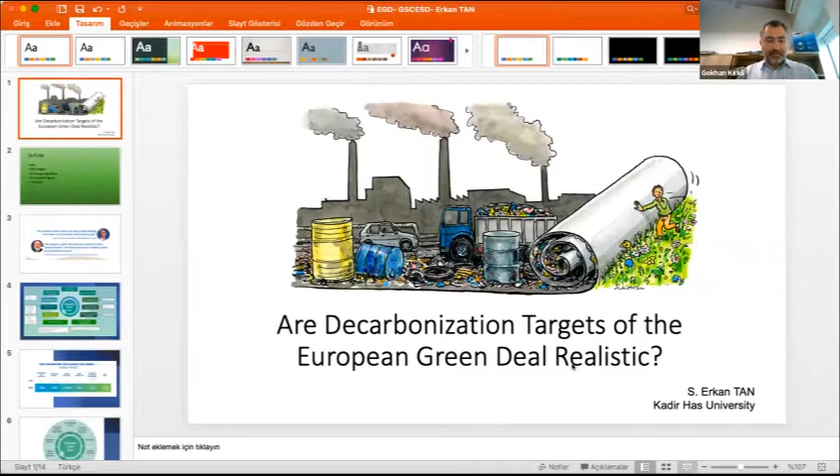Can you see the screen? Yes, okay. Hello again. I did this research last semester for a course of Professor Ediger.

The European Commission developed an extensive program called the European Green Deal. It launched in December 2019 and was approved in 2020 by the European Parliament with the purpose of making Europe the first carbon neutral continent by 2050. At first glance, it could be seen as a policy against climate change, but it is actually a new and green growth strategy of the European Union.

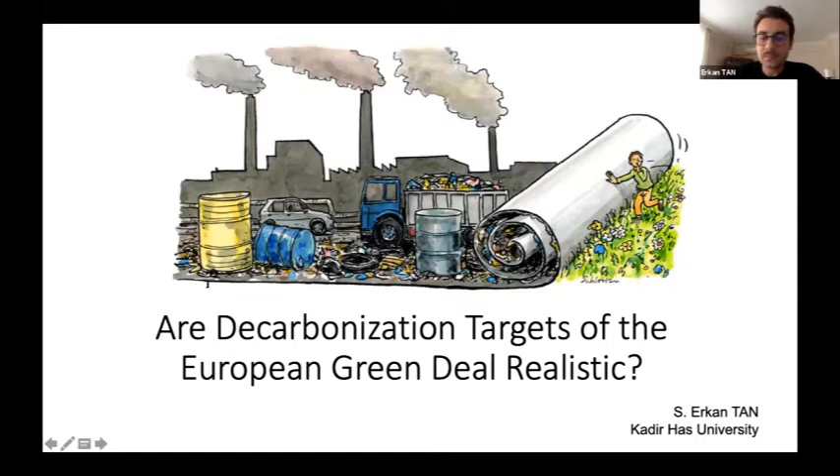In my presentation, I will talk about the EGD's targets, the EU's energy regulations, the EU Commission figures, and then I'll conclude.

As we all know, the industrial age started after the Industrial Revolution, and toxic gases, carbon dioxide released into the atmosphere, increased. We feel the negative impact of this on humans, like all living things in the ecosystem. Future generations will feel these threats more seriously, economically and socially. And the European Green Deal was created in response to these threats, actually.

The President of the European Commission, Ursula von der Leyen, described the European Green Deal as our new growth strategy. It will help us cut emissions while creating jobs. And Frans Timmermans said, we propose a green and inclusive transition to help improve people's well-being and secure a healthy planet for generations to come. As can be seen from these definitions, the European Green Deal is an economic growth policy that regards climate and environmental concerns.

As can be seen, in order to realize this transformation, they created policies for different areas under 11 titles. And in the study, I focused on the decarbonization targets of the European Green Deal.

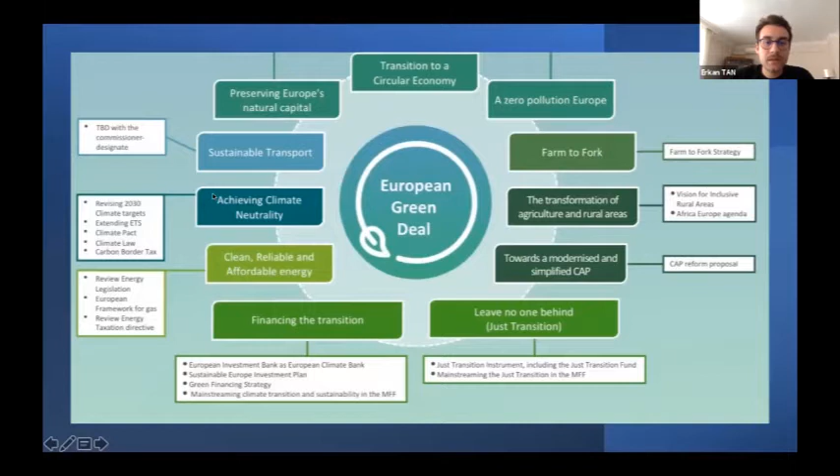The European Green Deal divides into two steps, such as 2030 and 2050 targets. These 2030 targets are also serving as a cornerstone towards the zero carbon emission 2050 targets. The European Commission has determined its targets for 2030 from the European Energy Directives in line with the Paris Agreement.

There was a revision of the 2030 climate targets in the European Green Deal, and they augmented the greenhouse gas emissions reduction target for 2030 from a minimum of 40% to a minimum of 55% compared with 1990 levels. But they didn't make any change for renewable energy and energy efficiency targets.

In the 2050 targets, the European Commission aims for a transition to a clean and circular economy. In this regard, it is emphasized to ensure that resources are used fairly and efficiently.

Also, the EU adopted a climate law in December 2020 to transform the 2050 climate neutral targets from a political challenge to a legal obligation. With this law, the political, economic, and legal regulations required to achieve the goal have been completed. Besides, the structure was arranged so that all sectors could act for the necessary change. So the EU will invest in eco-friendly technologies and support industry to innovate.

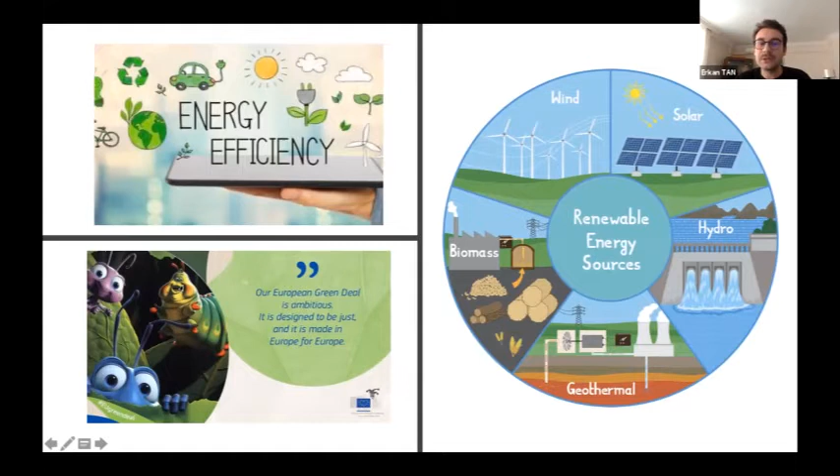European integration is based on political and economic processes. Member states cannot accomplish a coherent and uniform integration in energy due to their capacities, economic strengths, and international positions. Therefore, there are differences in the degree of ceding authority of union members at the European level.

European tendencies about energy-related issues can be divided into three phases. In the first phase, energy supply security for Europe was significant. The European Coal and Steel Community was the first common energy policy and integration policy among the countries in 1951. Its purpose as an international organization was to operate coal and steel reserves during the Cold War period, with a supranational basis.

After that, in 1957, the European Atomic Energy Community was established as an international organization after the Suez Canal crisis. The objectives of Euratom are to create a common market for nuclear power, to distribute electricity generated from nuclear power among member states of the community, and to sell the remaining energy to non-member countries.

In the second phase, they focus on the internal energy market, which has been privatized and competitive since 1987. The Single European Act was signed in 1986. It created a European energy market under the title of an internal energy market and liberalized the European gas and electricity market. In order to be successful, it began the ETS emission trading system in 2003 and became a pioneer in the world.

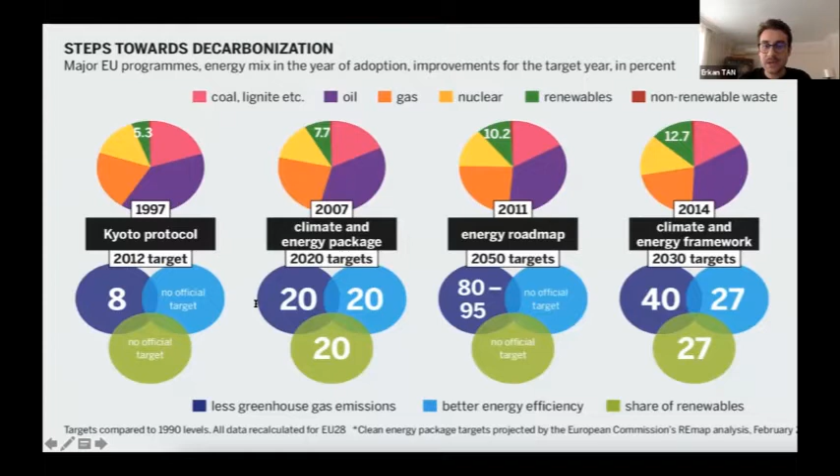In 2015, the European Commission launched the Energy Union Strategy, which aims to create an energy union based on secure, competitive, affordable, and sustainable energy for EU consumers, such as households and businesses. There are five aspects of the energy union: first, security, solidarity, and trust; second, a fully integrated internal energy market.

Third, energy efficiency. Fourth, climate action and decarbonization of the economy. Fifth, research, innovation, and competitiveness.

The main reason for the EU's struggle against the effects of climate change is its economic interests. For this reason, the Paris Climate Agreement, signed in 2016, is an international binding agreement which supports the EU's goals. And finally, as it's known, the European Green Deal was launched in 2019 by the European Commission.

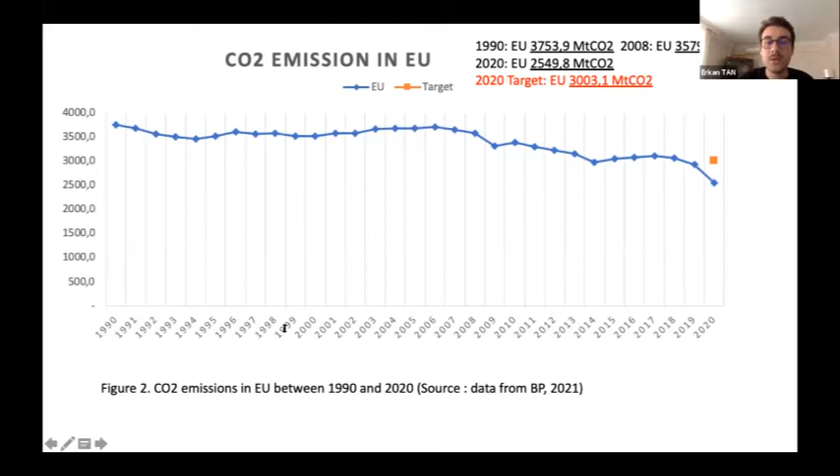In conclusion, in my opinion, the EU is aware that the devastating impact of climate change will adversely affect its economic development and competitiveness. Therefore, they have to realize a green energy transition. Moreover, the global pandemic, which started at the beginning of 2020, has created an opportunity for decarbonization targets, similar to the 2008 global economic crisis.

In light of this information, previous regulations of the EU have even exceeded the targets and have been successful. Furthermore, in future scenarios, it is expected that the 2030 and 2050 targets, like the previous ones, will become true with the EU's new regulations. Thank you.

Thank you very much, Erkan, for this very good presentation. It's also a timely topic because, as we know, the Turkish Parliament ratified the Paris Agreement two days ago, so there are lots of news in the TV channels and other newspapers about this. Are there any questions from the audience to Erkan?

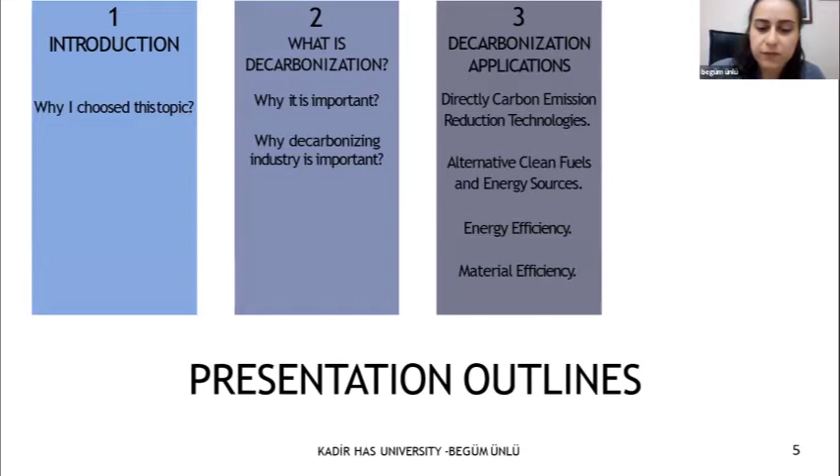Since my undergraduate degree is in industrial design, I learned about the industry through project ideas and internships, and met concepts such as sustainability and circular economy during my first work experience. Working to reduce environmental impacts in the industry became my focus over time, and I started my master's degree in energy and sustainable development. I aimed for my thesis to be close to circular economy at first, but through my research I discovered the topic of decarbonization - especially information from studies prepared around the world excited me.

In addition to the limited number of studies in this field in Turkey, the narrow scope of these studies made me realize that there is a deficiency in this field. So I decided to write this, hoping to provide inspiration to energy-intensive industries and related government organizations.

What is decarbonization? Roughly, we can say it's doing more with less. In Nakicenovic's words, decarbonization is doing the same work with higher energy efficiency and material efficiency, emitting less carbon per unit of energy consumed, and reducing energy, material or carbon density and carbon emissions through decreasing fuel, energy or material consumption.

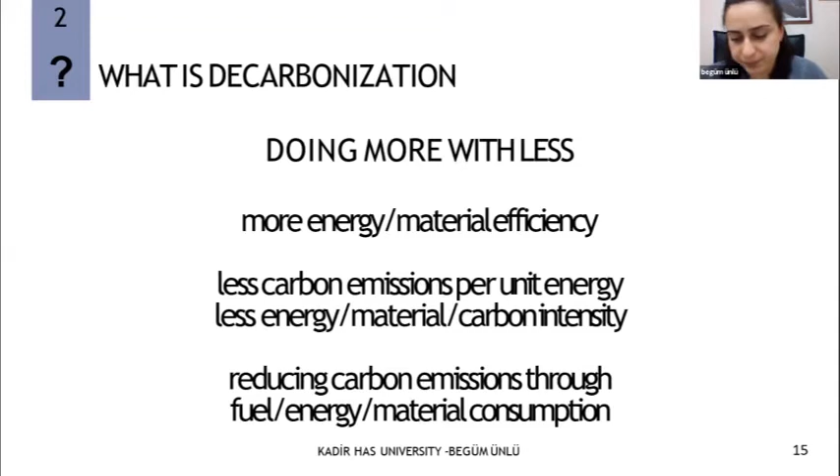Decarbonization is an important issue because we are facing a climate crisis globally, and we have to do something against it. Since the past, various meetings and agreements have been made in order to adopt common goals around the world. With each passing year, international organizations are increasing their pressure on countries to reduce their environmental impact and carbon emissions.

In this process, it is important to prevent the economy from being negatively affected. Ensuring decarbonization in industries where the economy is closely related, especially in Turkey, gives countries a chance for progress in line with these global targets.

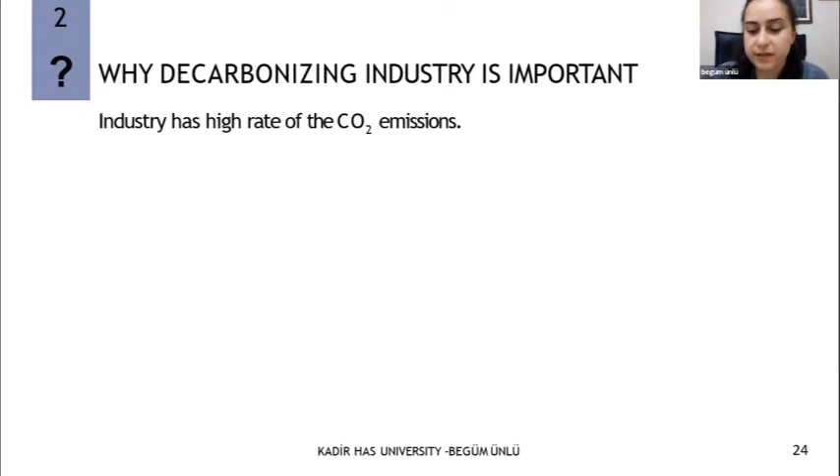Ensuring decarbonization in the industry is an important issue because the industry has a large share in carbon emissions. In the graph from IEA data, we can see the distribution of carbon emissions by sector in 2018. The industry sector has a total share of 18% and ranks third.

Also, when we compare, achieving emission reductions in the industry sector is harder than in all other sectors. This shows that we need more focus on decarbonizing the industry sector.

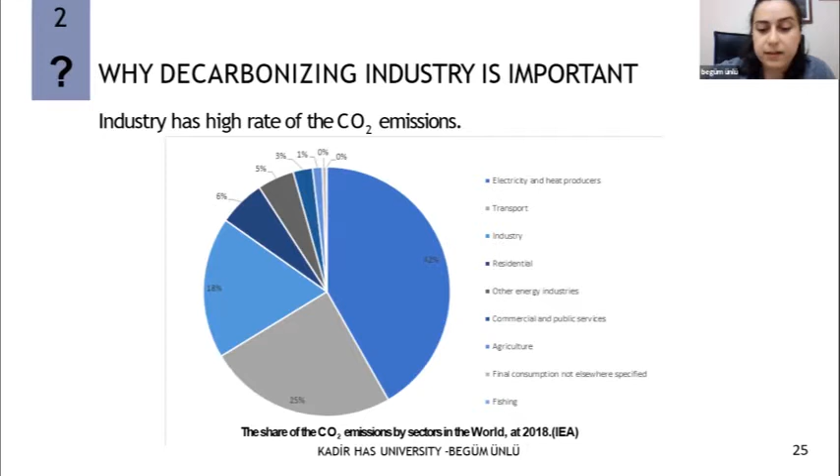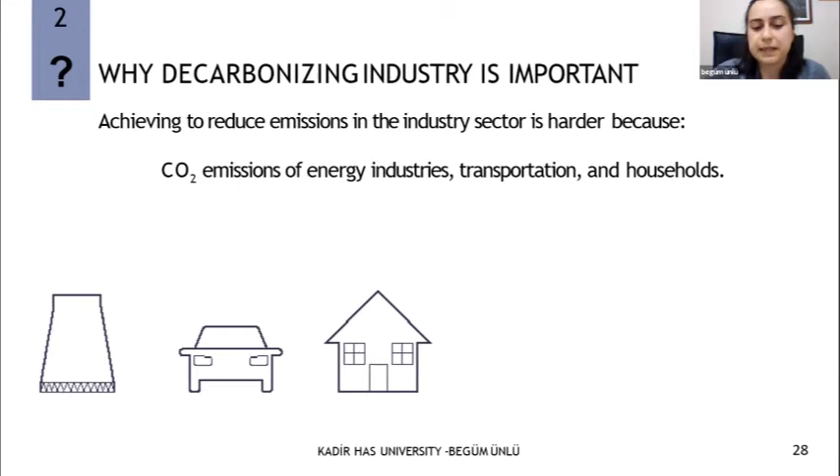Achieving emission reductions in the industry sector is harder than in other sectors because carbon emissions from energy industries, transportation, or households could be significantly reduced through transition to renewable energy sources and electrification.

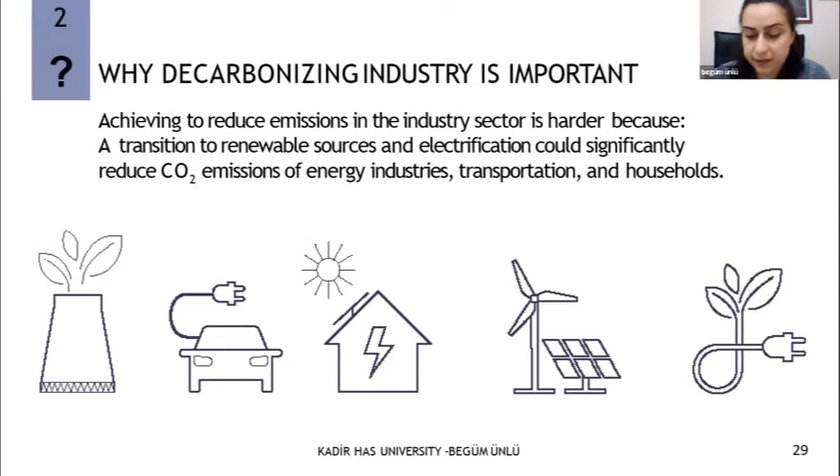Of course, this transition will not be easy, but I just want to point out that more efforts should be made to reduce emissions at similar rates in the industry sector, because achieving emission reductions in industry is harder, since the industry sector has numerous subsectors and facilities.

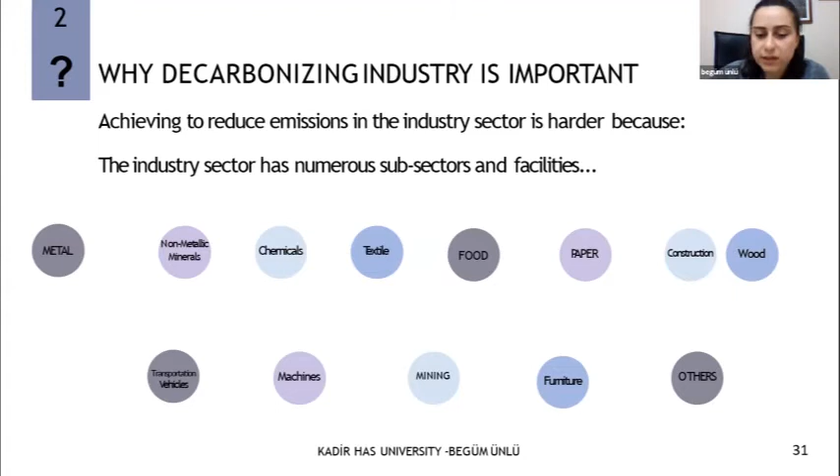In order to ensure decarbonization, solutions suitable for each production process, equipment and sector must be developed and applied. In the last part, I will summarize the decarbonization applications in the industry sector. I reached these decarbonization implementations from many studies, and I have classified them according to which stage they are used.

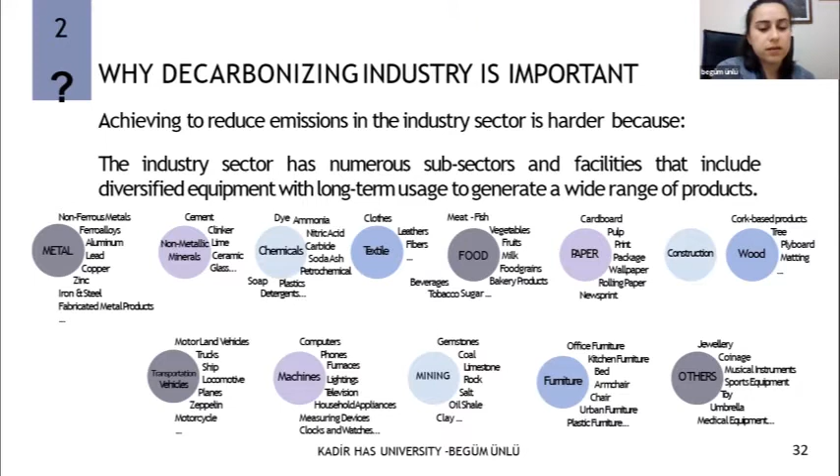As a result of production and consumption in industry, greenhouse gases, intensively containing carbon dioxide, are released into the air. If we directly deal with the carbon dioxide released into the air without making any changes in the production processes, we can use carbon capture and storage or carbon capture and utilization technologies.

But these technologies couldn't be applied right now because they're not commercialized yet.

The source of carbon dioxide released into the air is the type of energy used. It is also possible to reduce carbon emissions by switching to energy sources with lower carbon content. As you reduce the carbon intensity of the energy source, it is also possible to linearly reduce the carbon emissions caused by energy consumption.

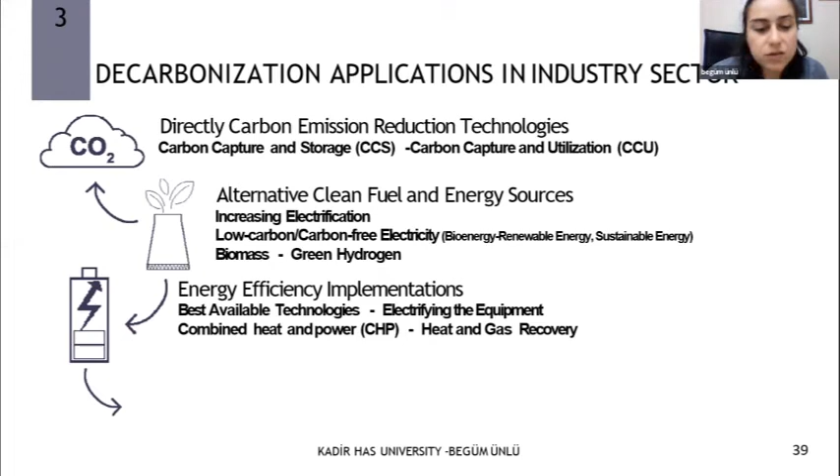All these production processes are carried out to finally produce a product. So increasing the efficiency of the materials used for the product will also indirectly reduce carbon emissions.

The solutions that increase material efficiency could be achieved by producing long-lasting and modular products, providing consumer behavioral change, increasing the recycling rate, producing the same product with less material using technologies such as 3D printing, and using materials with lower carbon intensity through material substitution, for example, using aluminum instead of iron.

And taking initiatives to reduce consumption and production with circular economy, for example, focusing on reduced consumption by improving sharing or product-as-a-service systems, or increasing industrial symbiosis.

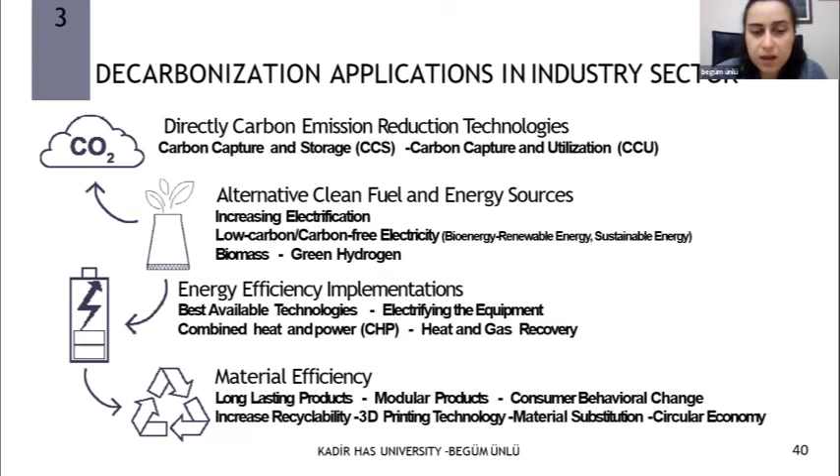And my presentation is final here. Thank you for listening to me. If you have any questions, I can answer.

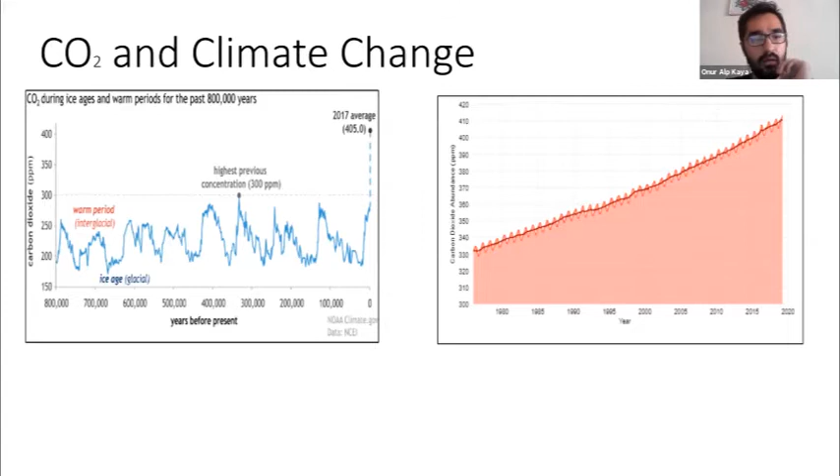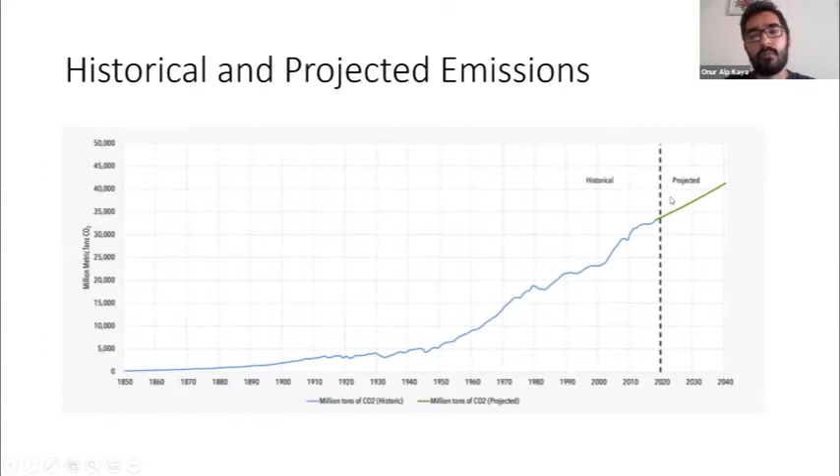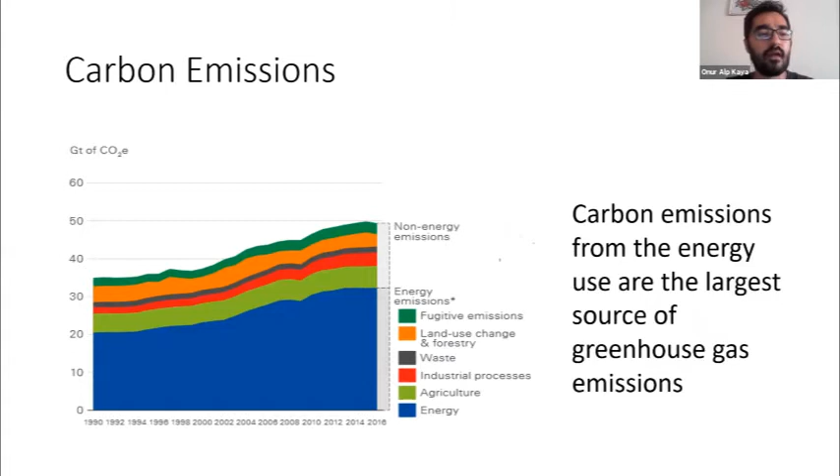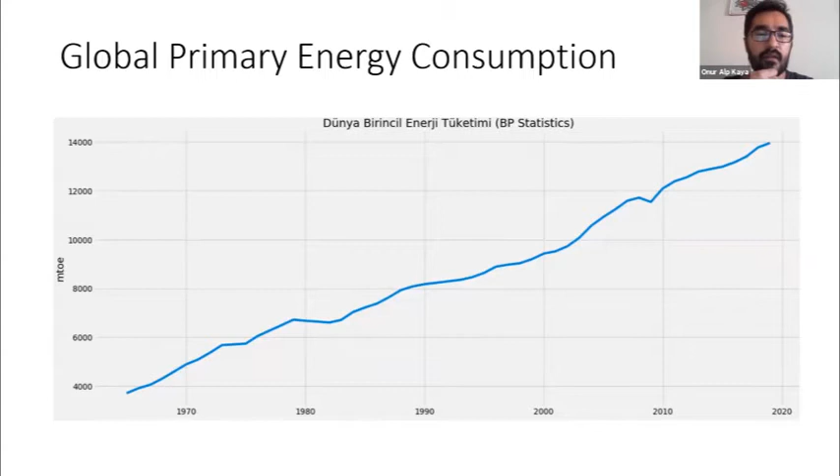When we check the global primary energy consumption, it's continuously increasing and can be expected to increase more in the following years. This means that we will need more energy and we will emit more carbon dioxide.

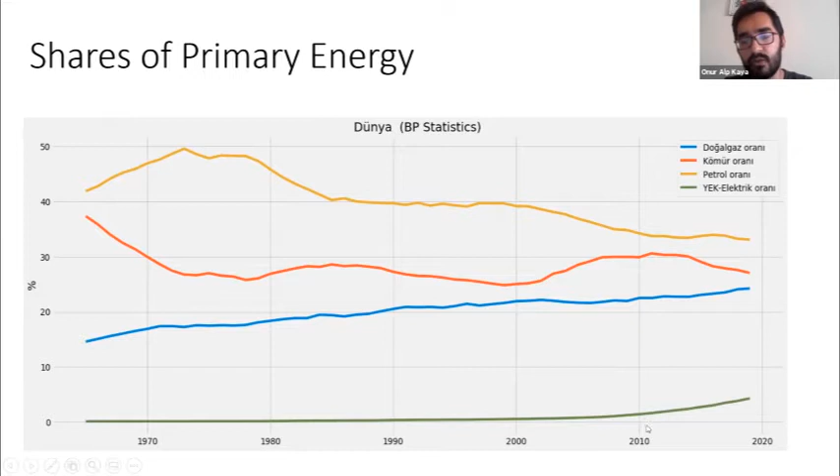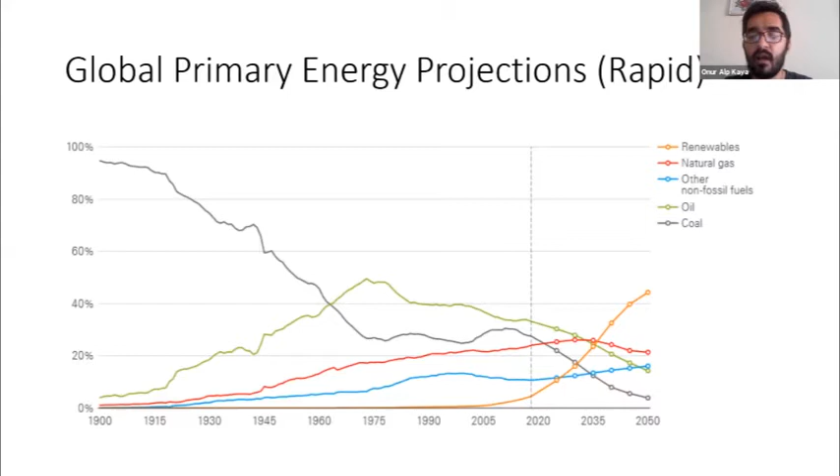So finally, when we conduct a price comparison between solar energy and oil and gas, we can see that when the oil price is equal to $13.7 per barrel, solar energy price should be less than $0.02 per kilowatt hour, otherwise oil is very cheap. Similarly, when the price of 1,000 cubic meters of natural gas is $110, solar energy should be cheaper than $0.02 per kilowatt hour. Otherwise, people will have a tendency to use fossil fuels instead of renewable energy due to economical concerns.

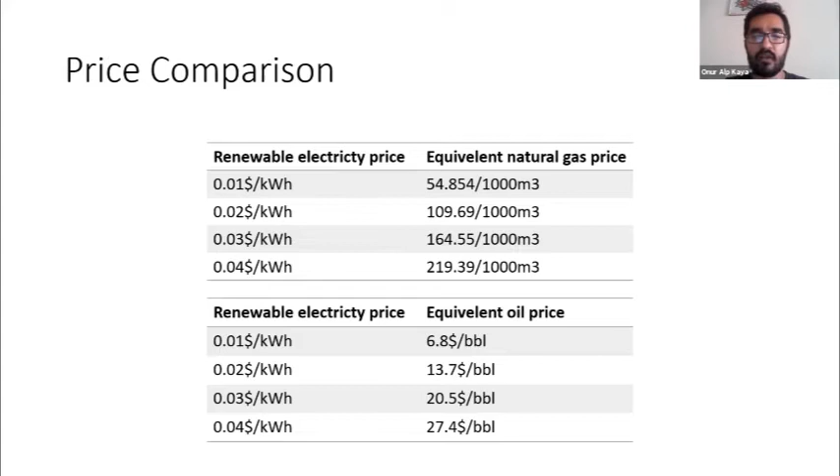So, usage of fossil fuels in the energy sector is the main driver of climate change, and fossil fuel usage will be more than the usage of renewable energy in the following years. It can also be cheaper than using renewable energy. Therefore, it's possible to expect high carbon dioxide concentrations as well as high greenhouse gas emissions.

Now, let's move to the second part and let me talk about carbon capture methods. The best possible way to capture carbon is from a point source. Refineries, cement and steel factories are considered high emitters and regarded as point emitters.

Basically, carbon capture units are installed in the chimneys of these point emitters, and once the capturing is started, they capture nearly 90 to 95% of the carbon dioxide from the flue gas.

Direct air capture is a possibility. It's possible to directly capture the carbon dioxide from the air that we everyday breathe in. However, it's not very feasible.

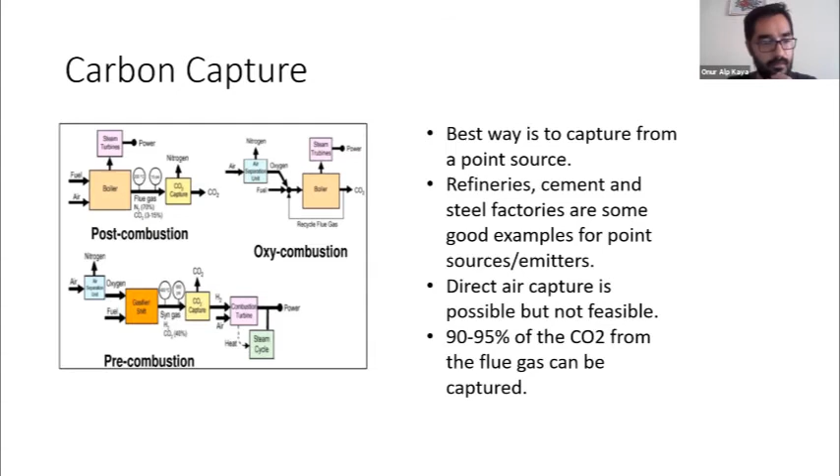In carbon capture and storage, or CCS, once the carbon dioxide is captured from the emitter, it's transferred to the geological storage area and injected into the geological storage unit. Oil and gas reservoirs, natural traps, are possible geological units for the storage. It is desired to permanently store the carbon dioxide in these traps.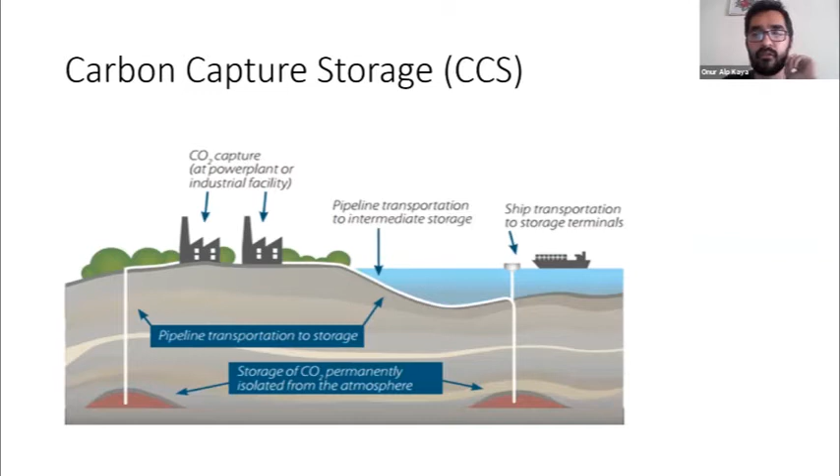In carbon capture, storage and utilization, or CCSU, the captured carbon dioxide is injected into active oil and gas reservoirs to produce more hydrocarbons. Once the production is completed, CO2 is stored there permanently. In the injection phase, CO2 is injected from one end, and at the production end, CO2 plus hydrocarbons are produced from the other end. Once the produced carbon dioxide is obtained at the surface, it's separated and injected back into the reservoir. So basically, there's a recycling process.

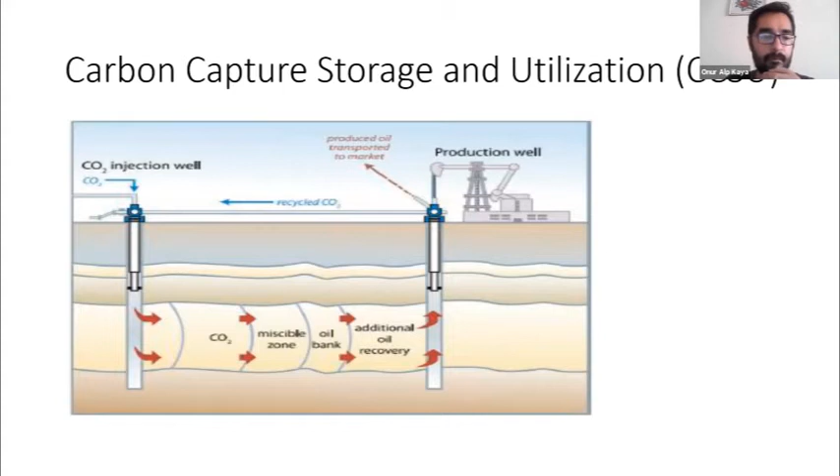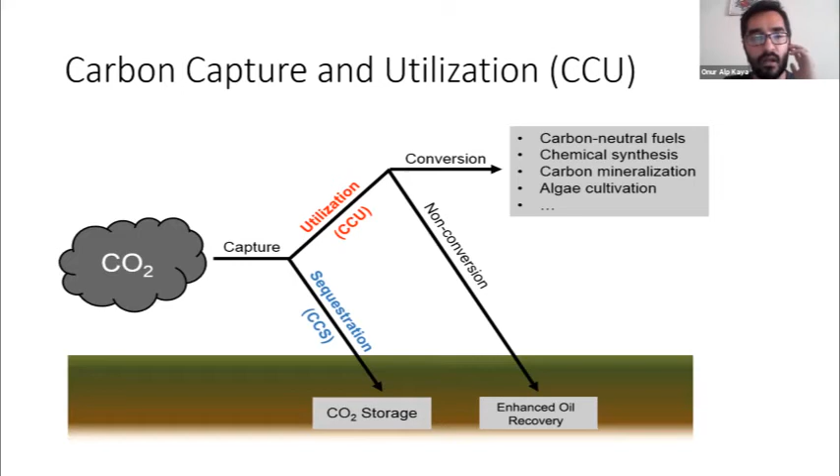In the carbon capture and utilization method, or CCU, captured carbon is used as a raw material for the production of other goods. It's possible to use it for carbon-neutral fuels, chemical synthesis, carbon mineralization, and so on. CCU methods are considered carbon-neutral methods, as they don't remove any carbon from the atmosphere, but change the form of the carbon dioxide.

When we check the historical carbon dioxide capture capacity, we can see there's a continuous increase in installed capacity. This technology is relatively new and has become more popular in recent years. Gas processing is the main area, but new areas are also being introduced for carbon capturing.

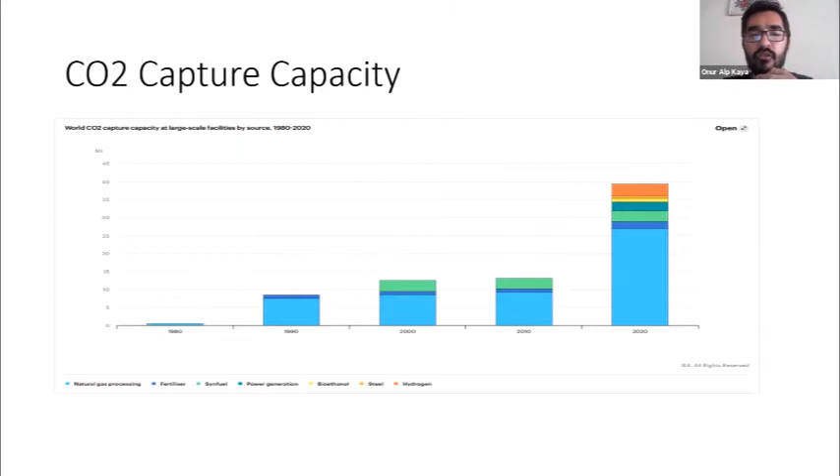As it is a new technology, it involves some possible risks, and this brings me to the third part of the presentation, which is the possible risks about carbon capture and storage methods.

This figure shows a typical hydrocarbon reservoir, with a cap rock that isolates the oil and gas reservoir from the rest of the geology. Below the cap rock there are hydrocarbons, and below that, at the bottom, is the water zone. Generally, carbon dioxide is injected into the hydrocarbon zone of the reservoir.

Injecting carbon dioxide at regions where we don't have cap rock, or above the cap rock, can cause problems because the CO2 is no longer trapped or isolated and can freely move to the surface or other geological units, and we miss the main objective in that case.

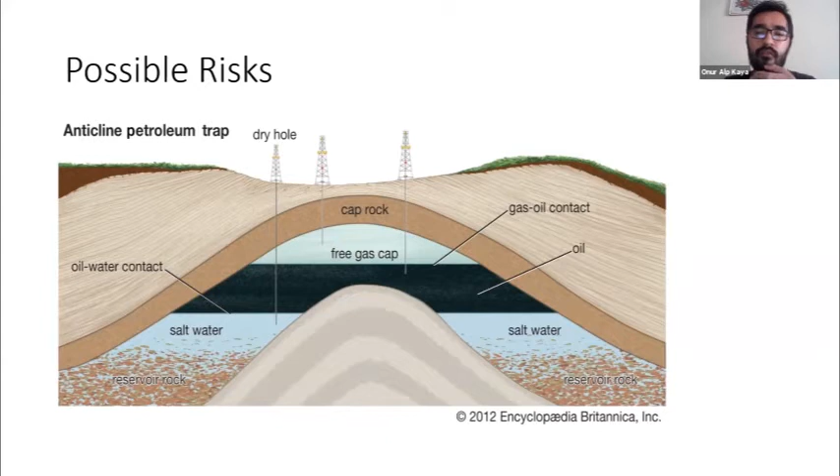Also, injecting carbon dioxide into the water zone is problematic because groundwater zones are very complicated and complex, with connections to oceans, nearby rivers or seas, and they can reach the surface, as happened in the Lake Nyos disaster.

A limnic eruption happened, meaning that carbon dioxide at the bottom of the lake reached the surface in a very short time. 0.1 to 0.3 million tons of carbon dioxide were released immediately, very suddenly, and overall 1.6 million tons of carbon dioxide reached the surface from the bottom. This disaster caused the death of nearly 1,800 people, which is a very high number, I believe.

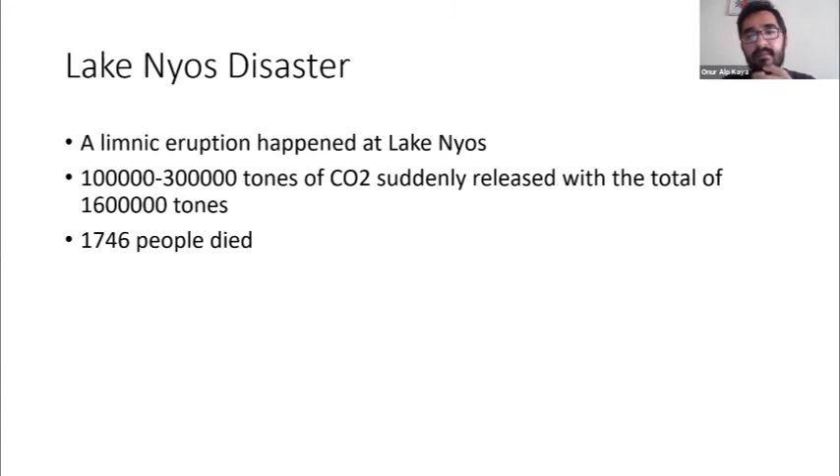Now let me talk about field studies of carbon capture and storage. In applications around the world, there are 37 large-scale CCS facilities, and 21 of them capture more than 30 million tons of CO2 per year, with most of them in the United States.

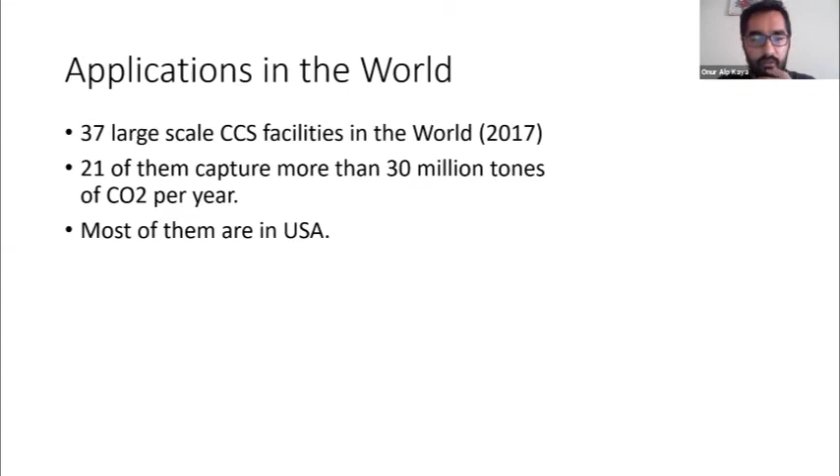It's a financially huge project. This project received $0.2 billion in grants from the government and another $250 million in loans from banks. Financing of this project was considered to be recovered through additional oil recovery resulting from the carbon dioxide injection. Approximately 4,000 tons of carbon dioxide were planned to be captured daily, meaning 1.4 to 1.6 million tons per year.

Due to the high distance between the point emitter, the coal refinery, and the oil reservoir, a pipeline was constructed for transportation of the carbon dioxide. Oil production increased from 300 barrels to 15,000 barrels per day, a 50-fold increase, which is a huge number.

However, due to the decrease in oil price, the project did not provide the required income. The expected oil price was $100 per barrel, but oil price did not reach that value due to the crash that happened in the beginning of the 2010s.

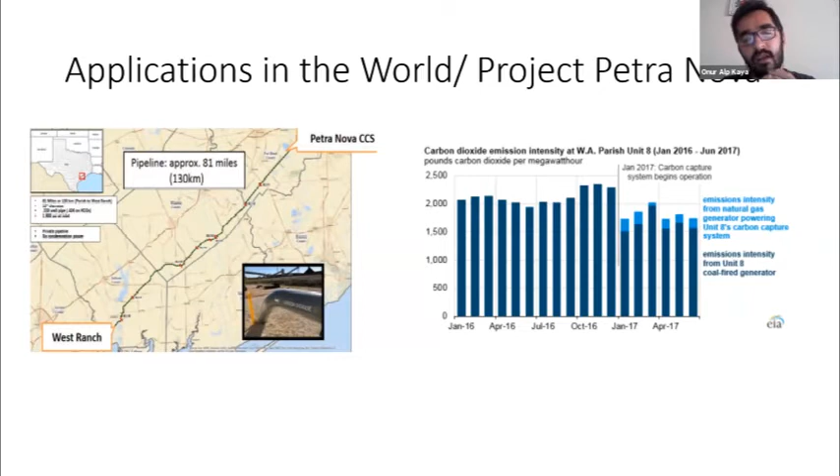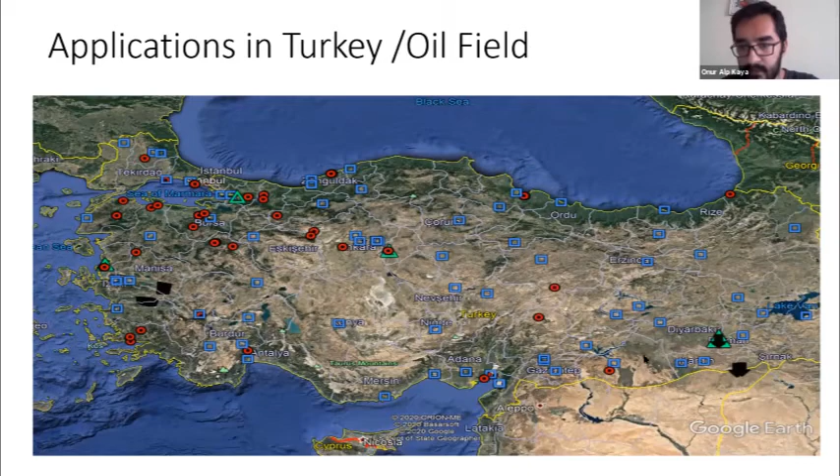Here, this one is Batman. Here we have the biggest oil field of the country, the Batıraman oil field, and we have a refinery nearby. So let me provide some information about the Batıraman oil field. This is the biggest one in the country. The estimated resource of the oil field is around 1.85 billion barrels. After the discovery in 1960, the production started to decrease, and carbon dioxide injection was considered and applied, which increased the oil production.

However, the source of the carbon dioxide was a nearby field, but it's possible to replace this source with the emitter, with the Batman refinery of Tüpraş. The distance between the Batman refinery and the oil field is around 8 kilometers, so the applicability is very high.

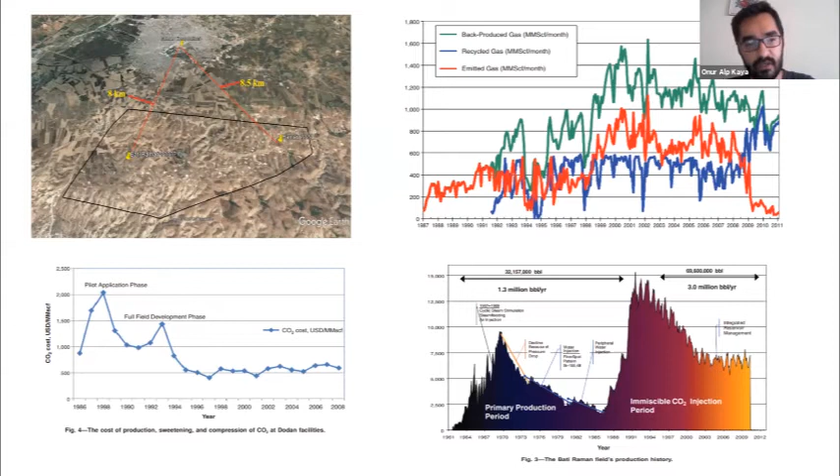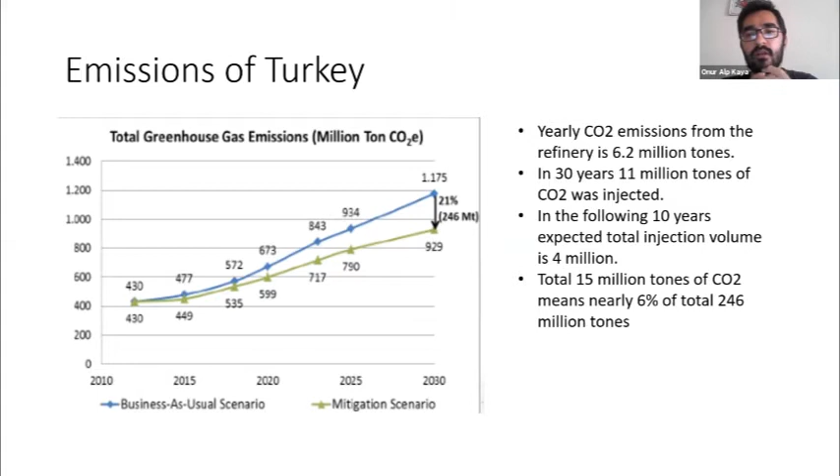When we consider the emissions of Turkey and the mitigation scenario in 2030, Turkey needs to reduce emissions by 250 million tons, which is nearly 21% of all emissions. In 40 years, 15 million tons of carbon dioxide is injected into the Batıraman oil field, meaning that nearly 6% of this 250 million tons is injected into the reservoir. So this could be one way to help Turkey mitigate its emissions.

Let me conclude my presentation. The atmospheric carbon dioxide concentration increased significantly in the last century due to the increase in greenhouse gas emissions. Fossil fuels in the energy sector are the main reason for the greenhouse gas emissions. In the following years, fossil fuels will still be the main energy source. A direct decrease method is carbon capture methods, and it's one way to limit the increase in atmospheric carbon dioxide concentration. However, it's not a sole solution, and it cannot mitigate climate change by itself. It could be a helpful tool to reach the defined goals and to mitigate climate change.

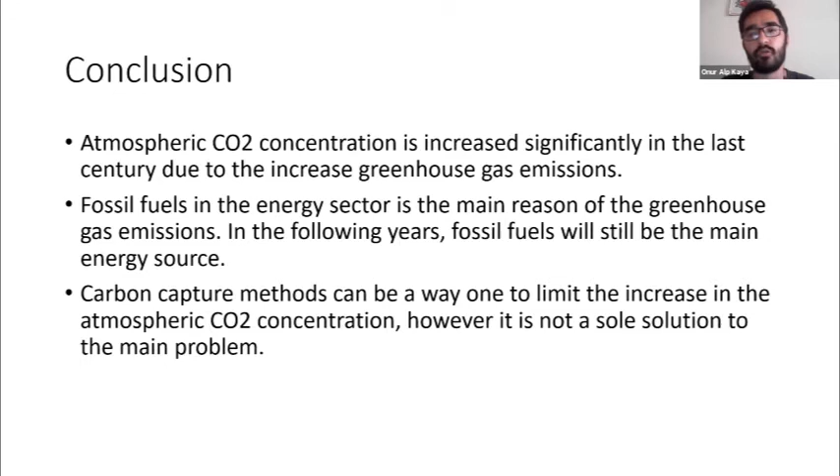I'd like to ask a question, Onur. Which department are you from? I have two master's degrees, one from petroleum engineering and the other from earth system science, both from METU. You've completed your master's study? Are you working somewhere now? Yes, I'm working at METU as a research assistant in the petroleum engineering department.

You mentioned Lake Nyos. Is that the correct pronunciation? A big accident, gas coming out of the lake, more than 1,000 people killed. Why? What was the reason for that? Was there a CCS technology underneath?

No, there was no CCS technology, but I would like to show that if CCS technology is not applied, installed, or designed properly, carbon dioxide can reach the surface if you inject it in the wrong zones, basically.

What was the problem there? Why did this happen there? I'm really not sure, because it's a limnic eruption and it's a natural event, basically. People shouldn't have lived near that region, that was the main reason actually. But because of tectonic activities, most probably the carbon dioxide from the bottom of the lake reached the surface. Exactly, that must be the only reason. There might have been some faults or cracks in the crust, so all of a sudden all the gas came out of the surface.

Okay, hello dear audience, I'm Fatih. I am a PhD student in industrial engineering at Kadir Has University, and I'm working with Volkan about the energy resilience topic. We are focusing on climate change and unexpected disturbance effects on power and gas systems especially. Today I will present what is resilience and optimum consumption in a possible scenario analysis for the Thrace Basin.

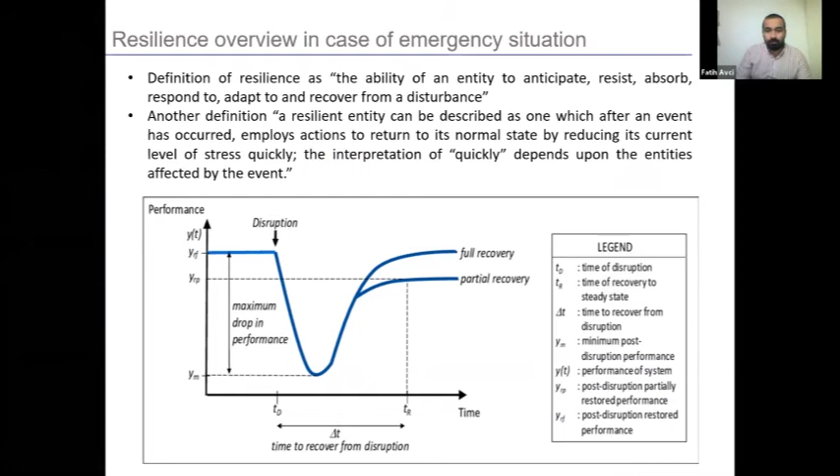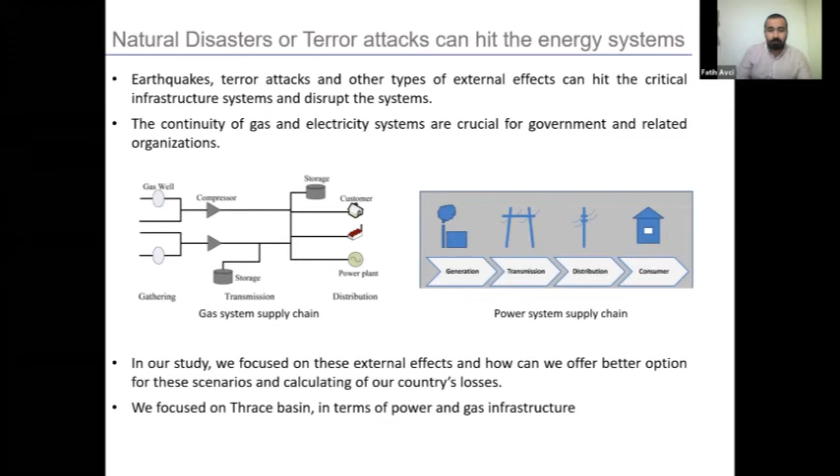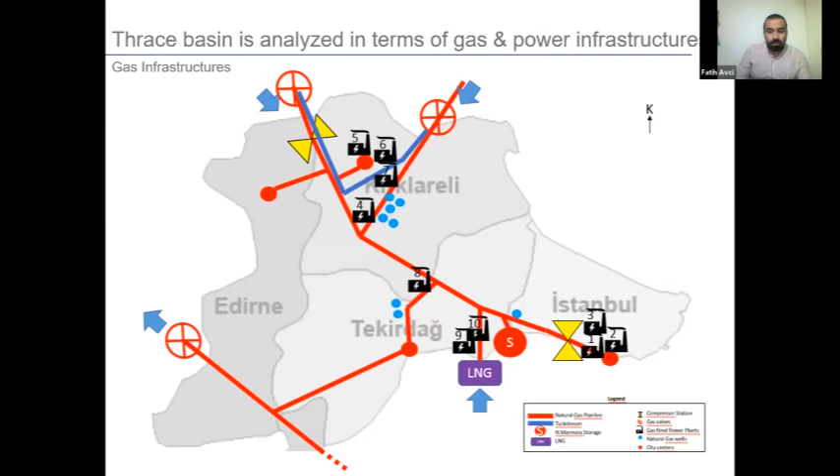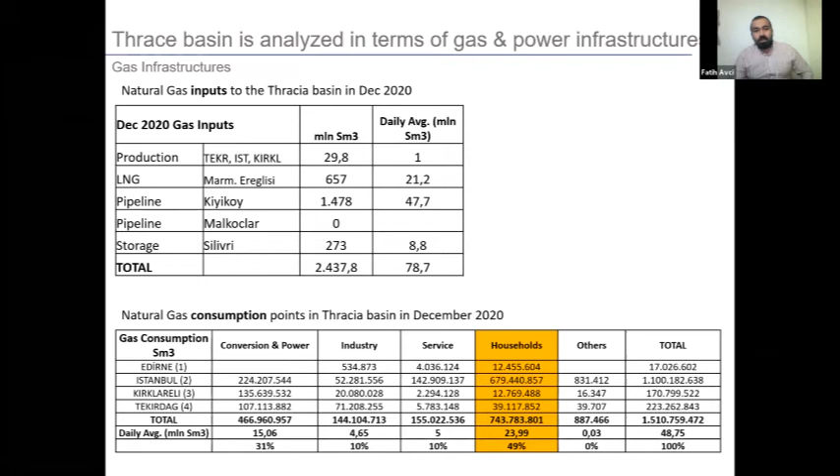Here you can see detailed information about the infrastructure, inputs, and consumptions. We analyzed the consumption in December 2020. The main gas is coming from Turk Stream, about 48 million meter cube as a daily average. You can see the consumption in the table below. The main consumer is households, around 50% of the consumption, because it's winter, it's December, and the main purpose is heating.

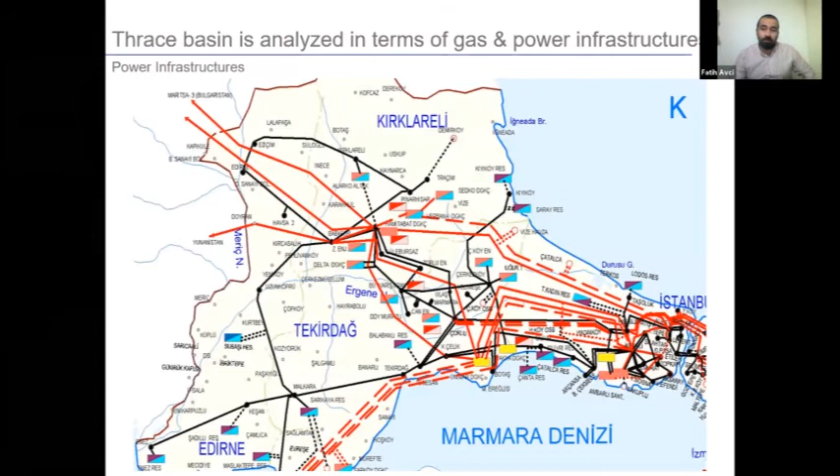In this slide, you can see the basic power generation points and the transmission lines. I should simplify this map, but I don't have enough time to sketch it again like the gas one, so sorry about this. Here you can see detailed information about the existing power plant capacities and the power generation from the cities especially. As a first approach, the generated power is not enough for the consumption in the Thrace Basin, so the region can be fed from other power plants from Anatolia especially.

There are two notes from this slide. 83% of the generated power was coming from natural gas fired power plants, and 45% of the total generation is coming from Istanbul-based power plants like Ambarlı and Esenyurt power plants. Both of them are operating with natural gas, so the natural gas supply is really critical for Istanbul.

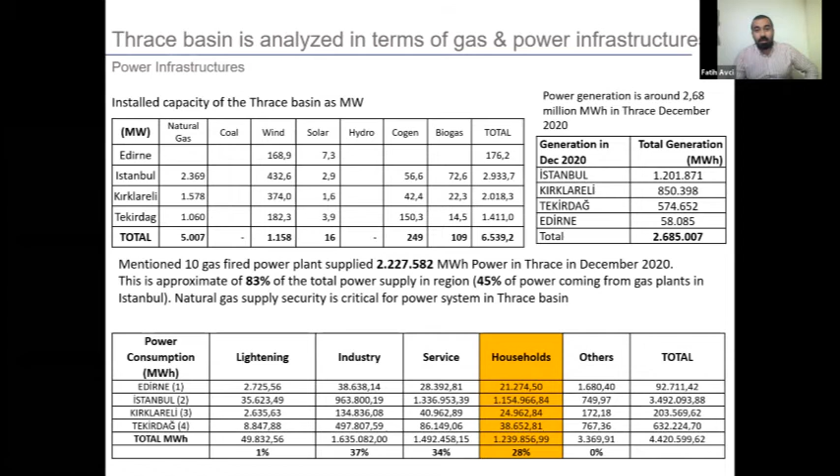As I mentioned before, we have two scenarios: earthquake and terror attack. The first one, earthquake hits the compressor stations in Ambarlı and Esenyurt region. It means no gas supply from Turk Stream to the Istanbul region. Only the storage system will feed Istanbul from the Silivri area. The second one is a terror attack happening in the main pipeline before Tekirdağ region, so the gas will come only from the storage and LNG system.

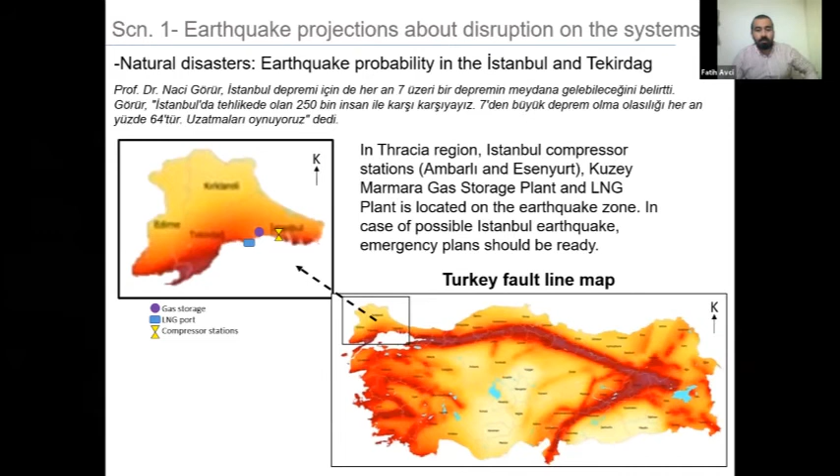So what about our scenario? In our scenario, there is a disruption in the entrance of Istanbul, in Ambarlı and Esenyurt compressor station, meaning gas is only provided from the Silivri storage area. This means there is less gas on the pipelines, and gas-fired power plants cannot be operated in Istanbul.

Because of winter times, gas should be transferred to households as a priority, for heating purposes. So the maximum daily injection of the storage facility is 25 million meter cube per day in Silivri, and households consume around 22 million. After households, gas will be transported to the service sector because its share in GDP is more than industry for Istanbul.

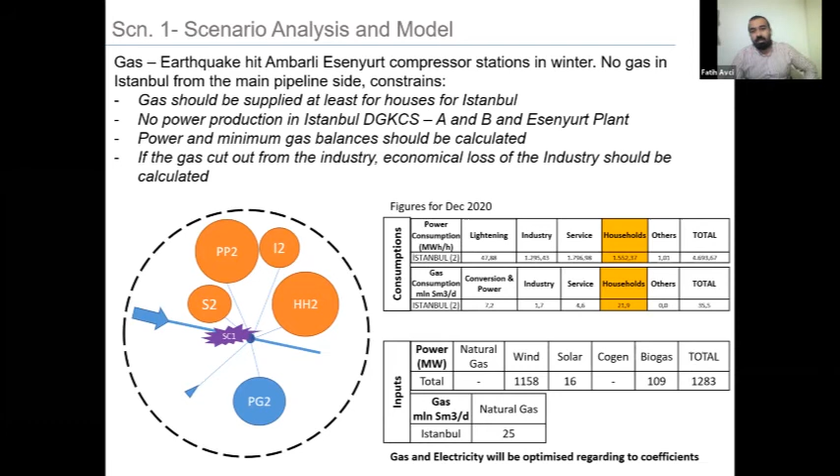This is a different case, because normally in another region like Tekirdağ or Bursa, industry has a bigger share than the service sector, but in Istanbul it's different.

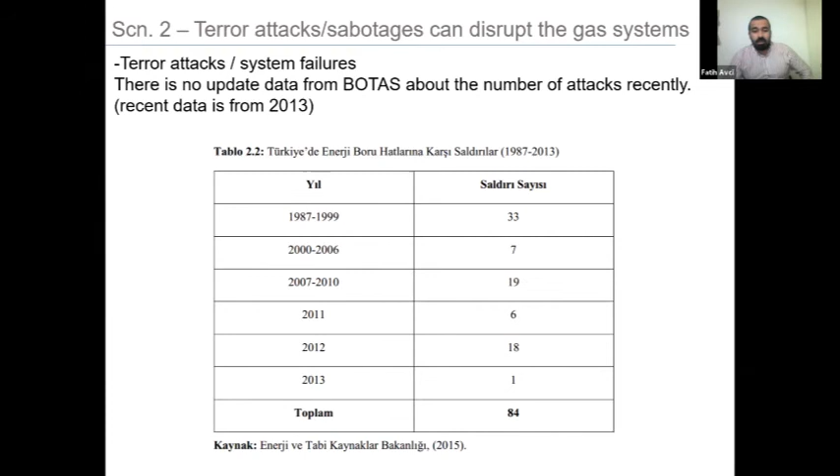So in the second scenario, we analyzed a possible case for the terror attack in the main pipeline. You can see the historical pipeline terror attacks in Turkey. Unfortunately, we don't have recent data from BOTAŞ; the last data is from 2013.

In our scenario, we have an attack on the main pipeline before Tekirdağ, so our constraints will be like this: gas should be supplied to households in Istanbul and Tekirdağ, and gas power plants in Istanbul should be stopped. The power and gas balances should be calculated for these constraints, and I will also show the economical losses of the two cities. You can see we can only feed the region with LNG and storage area.

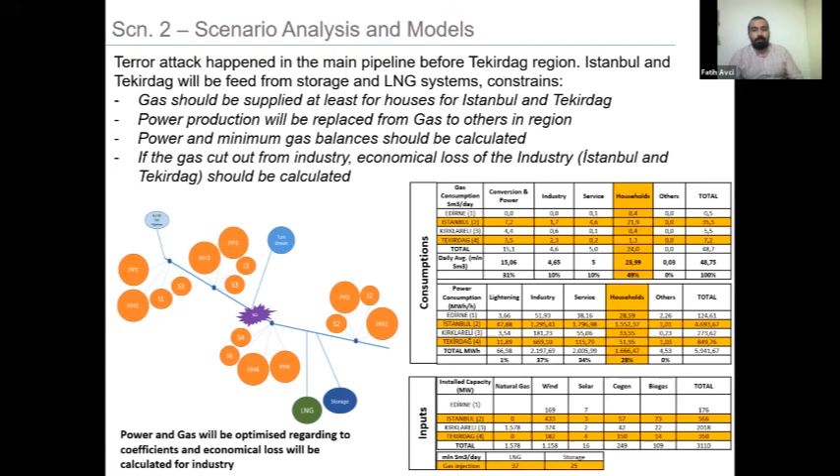These two cities need 23 million meter cube gas for households, 6 million meter cube gas for industry, and 4.8 million for service sector. For both cities, we can supply gas from both LNG and storage if both are available. If there is not an injecting LNG ship on the LNG terminal, the supply will be provided only from storage, so in this case gas will transfer only to household consumptions. For these cases, the authorities should solve the problem in terms of their priorities.

So this is the brief of both scenarios in the big picture. Scenario 1 is on the right side, mainly for Istanbul, and scenario 2 is for Istanbul and Tekirdağ.

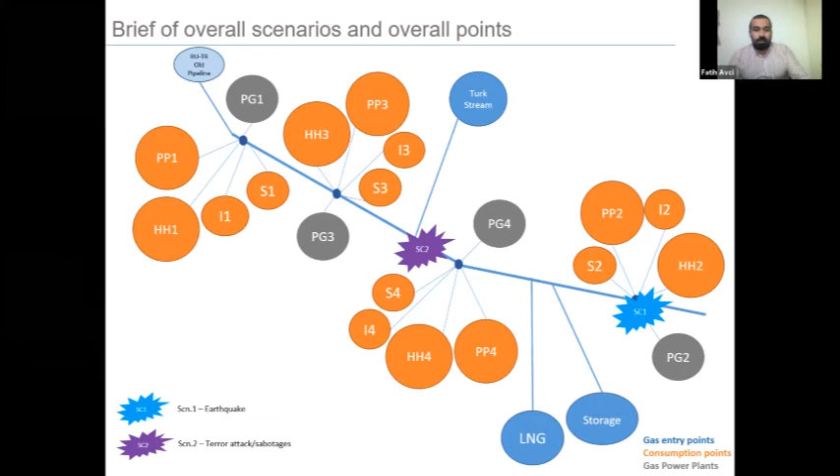As a final point, in scenario 1 the storage will feed the system, and 22 million meter cube will be provided to households in winter times without any interruption. The remaining gas will be directed to the service sector, as I mentioned, because it generates more GDP than industry for Istanbul. Gas is available on the Kırklareli site, and the gas power plants can be in operation in the Kırklareli region, so we don't have any electricity problem we are expecting like this, if there is no problem on the electricity transmission lines. Economical loss for Istanbul will be around

850,000 lira per day, and damaged stations and pipelines should be recovered as soon as possible, because if the service sector and the industry are not operating each day, they will lose 850,000 lira per day for the country economics.

In scenario 2, if the gas is only coming from storage, gas is distributed to household consumers for Istanbul and Tekirdağ. There will be a small amount of gas for the service sector, and GDP loss from both industry and service sector is more than 2 million lira per day in this case.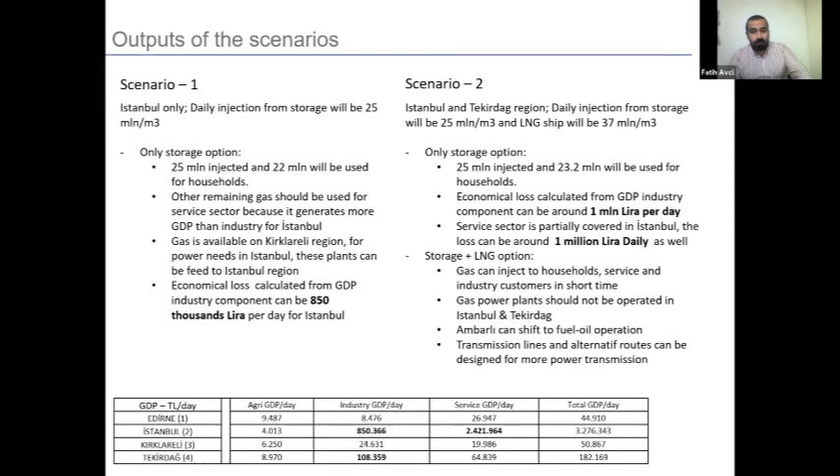As a conclusion, power and gas transmission constraints would impact the long-term planning schedule of energy systems. Installation of new storage systems or alternative compressor stations and implementation of fuel switching capabilities are effective strategies for a more resilient energy sector. In this way, the country can reduce economical losses and unexpected losses of industries and service sectors.

For better and precise calculations, energy resilience metrics should be measured for baselines especially. These metrics should allow the relevant boundaries for possible scenarios. Research and development studies should be made for advanced decision support to authorities like BOTAŞ and similar authorities. Energy is an interdisciplinary branch, as we know, and success will come with a multidisciplinary team. I'm basically mechanical engineering, but working with other disciplines, so in the energy sector it should be like this.

So this is the end of my presentation. If you have any questions, I'm happy to answer. Thank you.

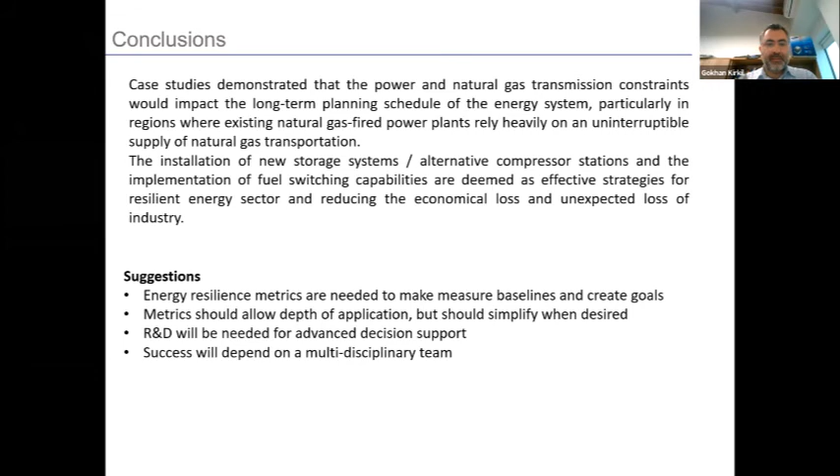Thank you, Fatih, for your presentation. It's actually a very good talk about resilience related to the topic of this session. Are there any questions from the audience?

If not, I have a small question, Fatih. When you say we should install more storage facilities and compression stations, will your research or thesis answer how many of them or what capacity should be installed where? Is that part of what you're going to answer in your thesis?

Yeah, we can answer like this. If there is not an LNG ship at that time—for instance, when an explosion happens, if there is not an LNG ship on our LNG terminal—we can need another capacity. But if I'm not wrong, there is an expansion of the capacity of the Silivri storage area, so I think after that expansion it will solve the problem. But we can calculate how much gas we need or how much extra capacity it should be. We can calculate this.